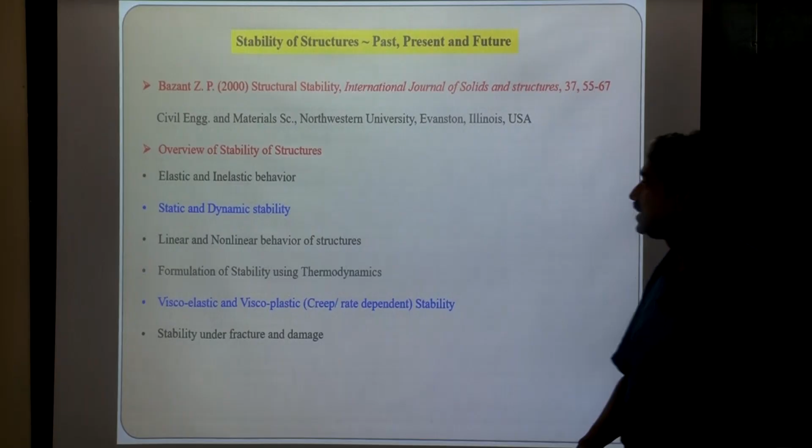So I am going to review stability of structure, its past, present, and the theory, the chronology of development, and then the retrospection of how the subject developed and who are the scientists who contributed to its development. So, the chronology you are going to refer to.

This is based on a review by Professor Bazant, who is one of the authorities in the theory of structural stability, and he has a book which can be treated as a Bible. He published a paper in the International Journal of Solids and Structures on structural stability. He is from Northwestern University, Civil Engineering Department.

The overview of structural stability we are going to present here would include inelastic stability and elastic stability first, and then inelastic stability as well. Although in the course we are going to restrict our discussion to elastic stability only, and that itself is the first subject. Then static and dynamic instability, and the importance of nonlinear behavior.

Initially it is linear, right? And formulation of stability using thermodynamics - why the use of thermodynamics may be useful or appropriate for formulating stability problems. Then stability behavior of time-dependent systems like viscoelastic systems and viscoplastic or rate-dependent plasticity problems, and stability under fatigue and under fracture and damage, which is a combination of geometric instability and material instability.

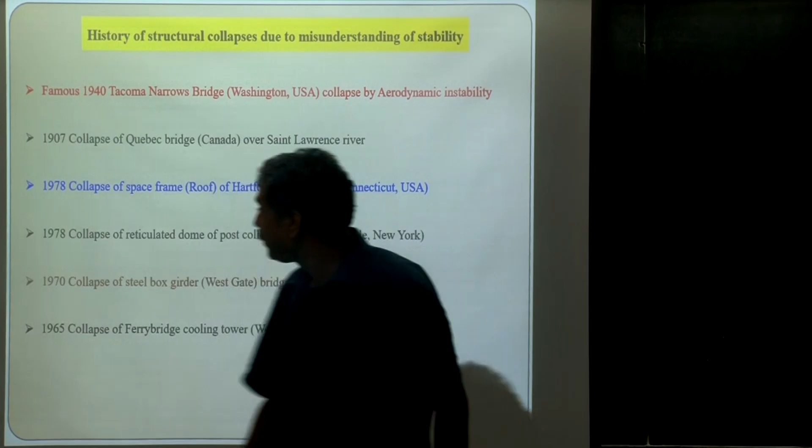There have been several failures that have triggered the quest in structural stability. Of course, 1940 is the Tacoma Bridge collapse, which was very famous or notorious - that happened on Tacoma Narrows Bridge in Washington, US, and it collapsed due to aerodynamic instability. Even before that, this is the most famous example, and all of us are aware about it. When we studied in school, we have seen the pictures, and videos are available everywhere to see how the collapse happened.

This is one of the more complicated cases which we will cover at the end of our course, but that is definitely a very compelling example of why we should study stability.

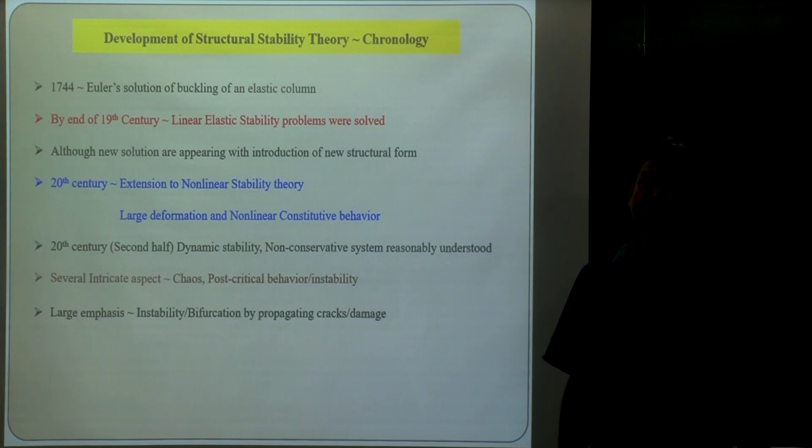Nonlinear stability theory is not very simple and not very easy to do, and it has been shown that we can capture very useful information even with linearized stability theory. They include large deformation and nonlinear constitutive behavior. So it is basically geometric instability which is responsible, and we make use of the geometric nonlinearity to develop stability theory, but along with that there can be interaction with nonlinear constitutive behavior. That means nonlinear stress strain relationship of material is also important, and that basically gets along with the geometric instability.

By the second half of the 20th century, you have a pretty good understanding of dynamic stability and non-conservative systems. Then there are several intricate aspects people started studying: post-critical instability, chaos, and today the larger emphasis in research is concentrating on instability bifurcation under material instability, that means in the form of propagating crack front or damage material like damage plasticity, for example concrete, some composites and others.

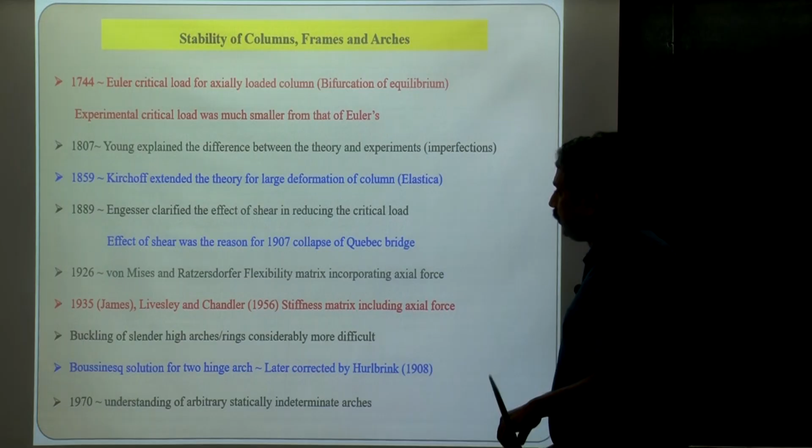So the stability of columns, frames and arches, you see these are the chronology of development. Euler's critical load was given in the 18th century, and once this theory was given, there was lots of doubt among people who didn't believe that whatever he proposed was good. Because there was huge disparity between the experimentally observed critical load and whatever was given by Euler's critical load. That disparity was explained by Young in 1807 using the concept of imperfection, that means the initial curvature of the column was responsible for this. Today also it is acknowledged that imperfections play a very important role in stability. We are going to study all these things.

Later, the elastica was introduced, where large deformation of a column was taken care of by Kirchhoff in 1859, and then subsequently there were other important effects like shear deformation, the effect of shear on buckling by Engesser in 1889. Unfortunately, lack of understanding of the effect of shear on critical load was one of the reasons for the failure and 1907 collapse of the Quebec bridge. Had we known these things, accounting for shear deformation would have prevented such a collapse.

Then for the frame, we have the flexibility matrix method and then the stiffness matrix method that were formulated. The problem with the flexibility matrix is that it gives inconsistent results, and sometimes it suffers from numerical instability. But then both of them were replaced by the modern finite element technique, which was developed around 1950s. The flexibility matrix approach was from 1926, and the stiffness matrix by James, Livesley and Chandler in 1935. Shortly after that, around the 1950s or so, finite element methods were gaining prominence and replaced these approaches.

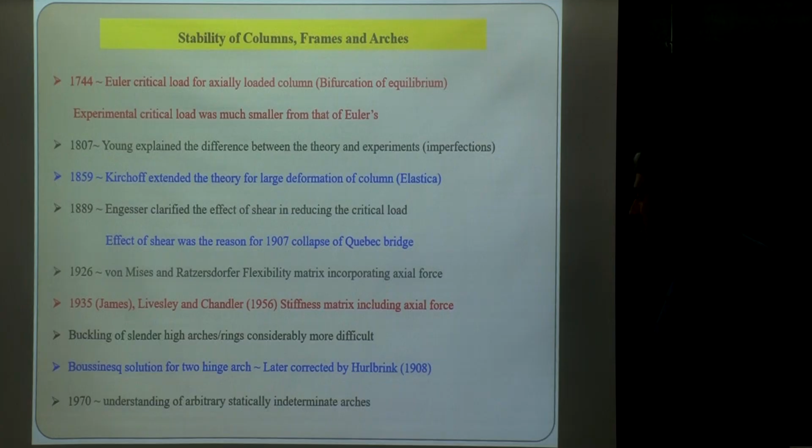Then of course those theories were extended to other one dimensional structures like buckling of cylinders, high arches, and rings. That was considerably more difficult, because arches and others have pre-buckling nonlinearity, and it has been seen that many people who tried to formulate it using linearized theory ended up getting wrong and inconsistent results. That is because all these things are significantly affected by pre-buckling nonlinearity. The first solution was proposed by Boussinesq for a two-hinged arch, and later it was corrected by Hurlbrink. By the 1970s, arbitrary statically indeterminate arches were understood.

Then for dynamic instability, as opposed to static instability, the notion of dynamic instability was given in 1893 by Lyapunov, the Russian scientist. He generalized the definition of stability for dynamic systems, and we will see that. And then there have been other systems like the parametrically resonating column.

A column, when it is axially compressed, beyond a critical value of that load, it will buckle. But if the axial load is changing over time, that means it is fluctuating or oscillating with some frequency, then something called parametric resonance happens, where the lateral vibration has half the frequency of the axial frequency of the column. So for resonance to occur, the load frequency should be 2 times that frequency. This is solved using the Mathieu differential equation, by Rayleigh in 1894. And all these, when we try to analyze static stability, are concerned with the positive definiteness of the potential energy.

That has been generalized to the topology of the energy surface, including kinetic energy for dynamics, and then we synthesize something called Lyapunov functions. That was also given by Lyapunov. There are alternate choices of Lyapunov functions that include the potential energy as well as kinetic energy, and these things were developed later.

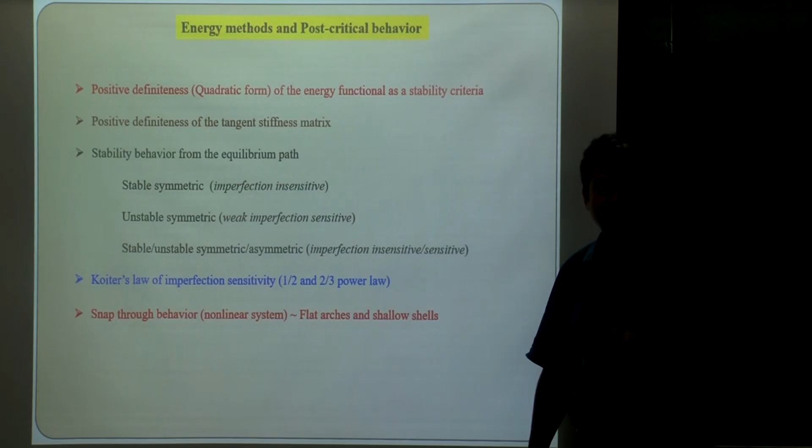Mostly for stability analysis we try to use the energy function, because that is the most standard and convenient approach, since energy is a scalar function. So we try to ensure the quadratic form of the potential energy function is positive definite, and we look at the tangent stiffness matrix in case of nonlinear behavior so that the tangent stiffness is positive definite. That basically ensures that the Hessian of the potential energy function is greater than zero.

Based on this energy approach, stability behavior can be classified into different systems, and we will study each of these. There can be stable symmetric bifurcation, unstable symmetric bifurcation. Whenever there is a loss of stability, what happens is that the system attains an alternate equilibrium configuration - the stable equilibrium bifurcates into stable or unstable equilibrium. That's what bifurcation is, associated with buckling. So you will see stable symmetric bifurcation, unstable symmetric bifurcation, or asymmetric bifurcation.

We will study these different classes of behavior, and along with that, depending on the system, there can be imperfection sensitive or imperfection insensitive behavior, meaning in the presence of geometric imperfections the system behavior can be drastically different. They can lower the critical load significantly, and that is called imperfection sensitivity. There are universal laws for this imperfection sensitivity that were developed by Koiter, called weak and strong sensitivity, with half-power and two-thirds power laws derived.

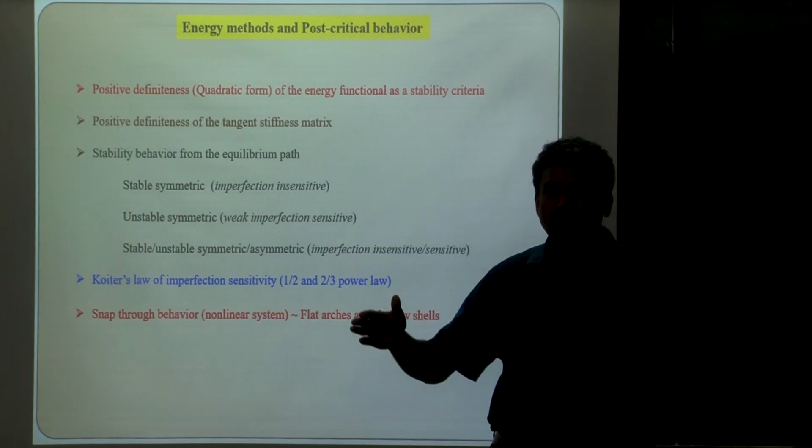Now there are other systems, nonlinear from the very beginning, in which the bifurcated configuration is not in the immediate vicinity of the original one. When a column buckles, it just achieves a little deflected configuration. But there are systems like the von Mises truss, or an arch, which on buckling immediately jump into a different configuration far apart - there is a huge gap between the alternate configuration and the previous one. These are called snap-through behavior. Those systems cannot be meaningfully linearized, which we are going to demonstrate.

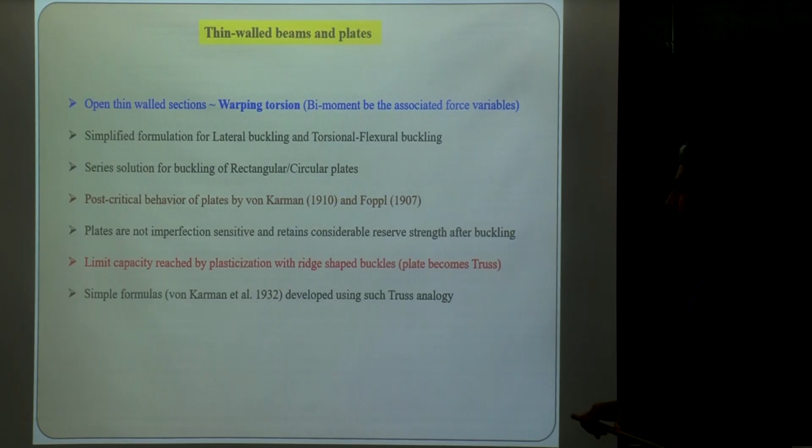Along with that, there are other sections, thin-wall sections, where along with Saint-Venant torsion, there is warping torsion, meaning the cross section deforms under torsion. You have to consider the associated force variable called the bi-moment - those of you familiar with advanced structural analysis of thin-wall sections may know what bi-moment is. Then there are formulations for lateral buckling and torsional-flexural buckling, and there are solutions for all of these that we have developed.

Then what we are going to do now is move to the more intricate topic, which is buckling of shells. Buckling of shells has a very fascinating history with a long gestation period. Initially, Lorenz, Timoshenko and Southwell started estimating critical loads for pressurized spherical shells and axially compressed cylindrical shells, because these are the two most common examples - axially compressed cylindrical shells and spherical shells under external pressure.

They found some solution based on linearized stability theory. At that time, nonlinear theory was not very well developed, and then what they saw was, oh my God, the experimental critical load they were getting is very low compared to whatever was the theoretical prediction from linearized stability theory, 3 to 8 times smaller. Can you understand the difference?

This created lots of confusion in the minds of researchers, and shell buckling always remained a very important area of research. It is a very interesting problem even today. A shell buckling research community exists, and people's contributions are always documented there, with great collections of literature.

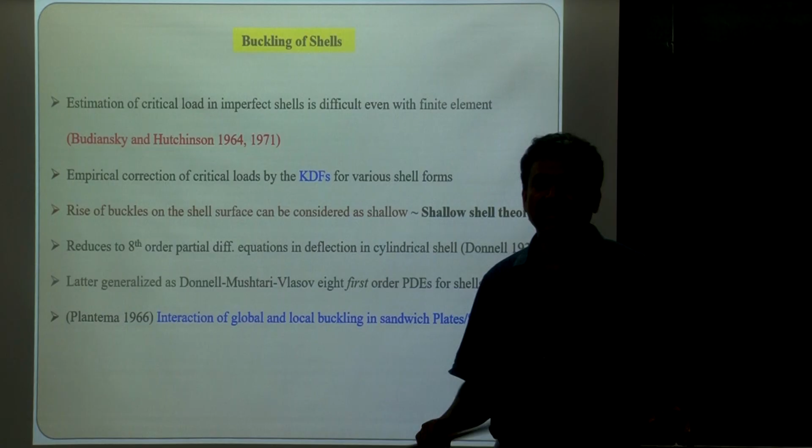Even with finite element - today's stability analysis all relies on finite element, because we have commercial software, a $1 billion industry, and we all try to use it because it's simple. Gone are those days when people used to derive lots of complex differential equations and analyze them analytically, so you have much less effort today. But even with finite element, Budiansky and Hutchinson demonstrated that it is extremely difficult to capture the theoretical load, because we have very inappropriate representation of the exact imperfections.

Traditionally imperfections were assumed to be self-affine to the buckling mode geometry, but it is not. Sometimes it is random, and that is why probability theory plays a very important role in defining this geometry, and that is what people are doing today.

So, in order to avoid these things, empirical corrections were given on the theoretical critical load by multiplying with a reduction factor, called the knockdown factor. This knockdown factor formalism is used by NASA in the US for all their space programs, using a KDF that is geometry dependent and loading dependent, for different geometry and loading conditions of the shell.

This is used. Then later there was the shallow shell theory, from the assumption that the buckles which form, the rise of buckles on the shell surface, can be considered shallow. Using that, Donnell defined an 8th order partial differential equation for the cylindrical shell, the very famous Donnell equation for buckling of cylindrical shells, and that was later generalized by others like Mushtari and Vlasov.

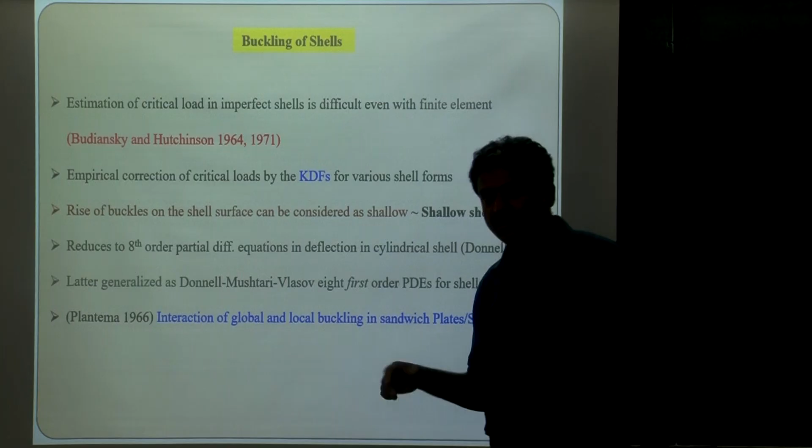Then there is inelastic stability, elastoplastic stability. This was first attempted by Engesser, who also investigated the effect of shear deformation on buckling load. He said for an inelastic column, you can just replace the formula pi-square EI by L-square, the critical load, by replacing E with the tangent modulus for the inelastic analysis.

But then later, in 1895, he reversed himself. He said let us use, for the geometry, a dependent weighted average of the loading and unloading modulus, which was referred to as the reduced modulus. But then people saw there was huge disagreement between the theoretical value given by the reduced modulus and the actual experiment on aluminum alloy, which was mostly used by the aerospace industry because of its lightness.

Then in 1947, Shanley used a simplified inelastic model for the column, and demonstrated that the original proposition of Engesser, using the tangent modulus, was the correct one. This was because there was a problem in the assumption that the column does not buckle at constant load but at increasing load, and because in inelastic behavior you can have hardening-kind behavior as well. That was the main difference.

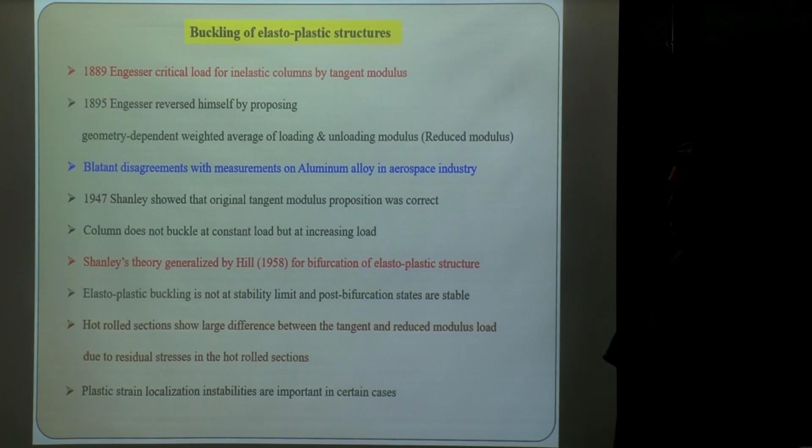There is huge influence of locked-in stresses, or residual stresses, demonstrated by the huge disparity between the theoretical load and the experimental load in hot rolled sections. That was attributed to residual stresses, because there was a huge difference between the tangent and reduced modulus loads. This also has important bearing in formulating code provisions, because in codes, when you deal with rolled sections, you need to take this into account. So some modifications have been done.

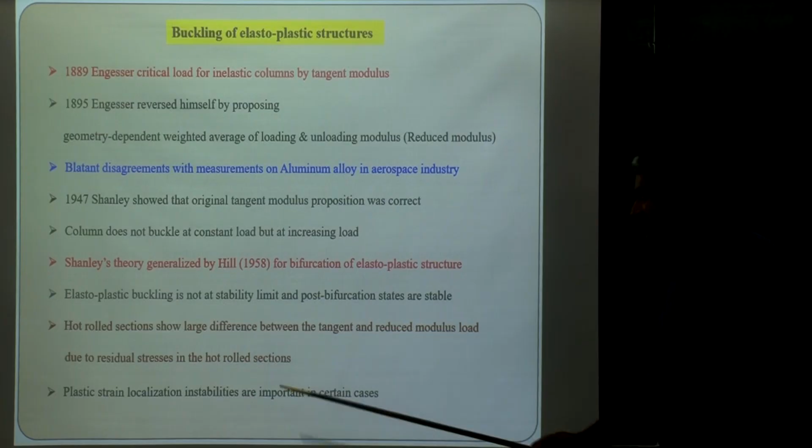It is not always that uniform yielding will happen. There are instances in which plastic strain localizes. For example, whenever you do tensile testing, you see there is a Luder's line that forms, a shear band. So those are some kind of localization of plastic strain, necking kind of behavior.

So, plastic strain localization instability is also important. Other than that, what we have seen is that while all elastic structure analysis is fine, inelastic structures basically include dissipation, sometimes inelastic dissipation of energy, because there is hysteresis - loading and unloading paths are different, and that leads to dissipation. This can be best accommodated using irreversible thermodynamics, where you can use different alternate energy functionals, like what we have learned in thermodynamics - Gibbs or Helmholtz free energy functions - and thermodynamic criteria have also been developed.

In stability analysis using energy functional, you have a Hessian of the energy functional. For equilibrium, you have minimization of potential energy, and then second order of potential energy, or for a multi-degree of freedom system, the Hessian of the potential energy functional. Its determinant must be greater than 0 to satisfy the stability criteria.

Whatever was done using energy functional can also be equivalently transformed into a thermodynamics context. Positive definiteness of the tangent stiffness matrix is shown to be equivalent to the negative of the entropy increment. We cannot measure entropy, but change in entropy can be measured. If the entropy increment for a system is negative, that is equivalent to positive definiteness of the tangent stiffness. So for inelastic systems, or systems with lots of dissipation, the thermodynamic framework can be used very efficiently to tackle inelastic stability.

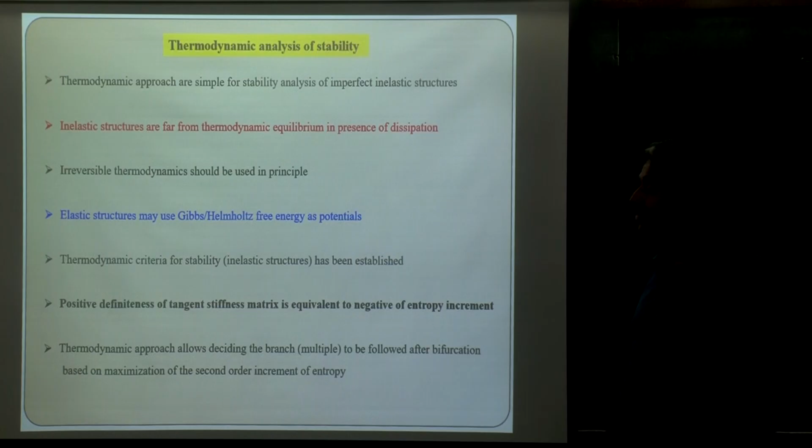Another important thing: sometimes the equilibrium path bifurcates into an alternate equilibrium path, so multiple branches occur. Now, which branch should be taken by the structure? That is a problem in numerical simulation in finite element analysis. Instead of using energy formulation, if you use thermodynamic formulation, you can very easily find out which path to follow, based on the maximum of the second order increment of entropy. That is another important result.

Now there is localization instability due to damage - this is a material instability. What happens is that sometimes damage localization occurs due to strain softening, like concrete after yielding: there is a softening branch, it does not strain harden. So for this descending peak, there is loss of positive definiteness due to softening, and the elastodynamic boundary value problem changes from hyperbolic to elliptic, per Hadamard.

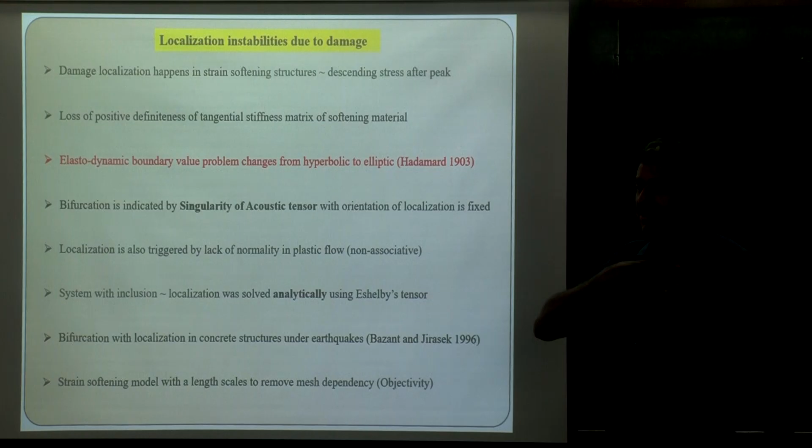There is something called the acoustic tensor that can be formulated using the constitutive matrix and the orientation. Whenever there is strain localization, there is a jump, a discontinuity in the strain field. Displacement will be continuous, but strain will be discontinuous. Those things can be found by searching for the singularity of the acoustic tensor. So that is also a kind of instability, in terms of material instability.

Then there is instability due to propagating fracture - single fracture, multiple fracture. These are all instabilities induced by cracks, propagating cracks, and others.

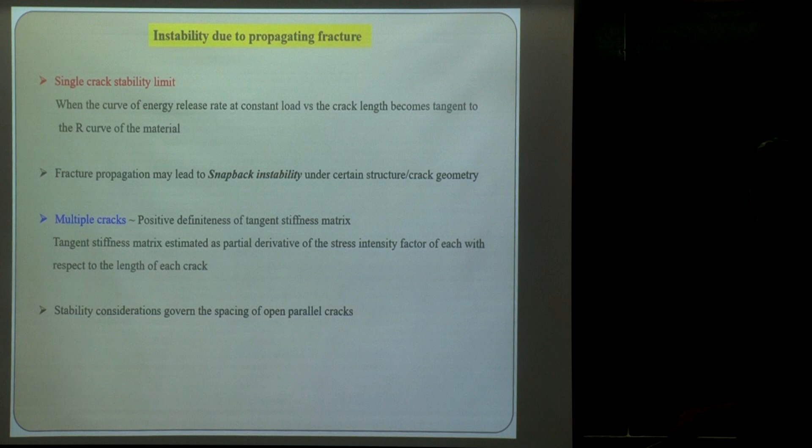Then there is time-dependent behavior in viscoelastic and viscoplastic structures. For viscoelastic systems, there is an equivalence principle: you just replace the modulus of elasticity with the viscoelastic operator and solve the equation. Of course it will be time-dependent, but the important thing is there is a long-time buckling problem, because with time the buckling load is going to change. It's formulated by replacing the elastic modulus with the respective viscoelastic operator, expressed either in rate type using a differential equation, or integral type using an integral equation.

This is referred to Freudenthal, who was also a big name in structural safety. It is not the load that is important, rather the time must be large enough to reach the critical load. For a viscoelastic system, the time required to reach that critical load should be long enough compared to the design life - that's how you ensure the safety of the structure.

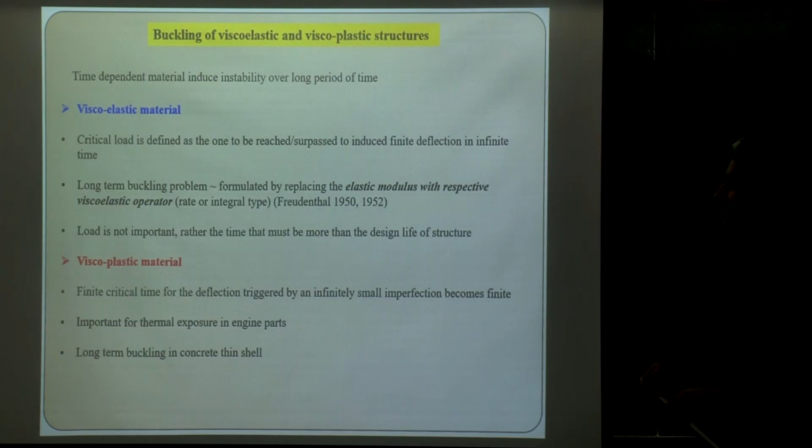Similarly for viscoplastic behavior, the only difference is the approach - you need to ensure a finite critical time for the deflection. In viscoplastic material, deflection increases with time as strain accumulates, which we refer to as creep, due to viscoplasticity. These things are also very important.

Of course this is also inelastic, because with viscoplasticity, yielding happens and at every time instant there is a change. There have been models for this, and it is extremely important for aerospace engines and others, where the material shows viscoelastic behavior at elevated temperature. You have to ensure that the critical time for deflection triggered by infinitely small imperfections becomes finite - a small imperfection can have huge implications for viscoplastic materials because it accumulates.

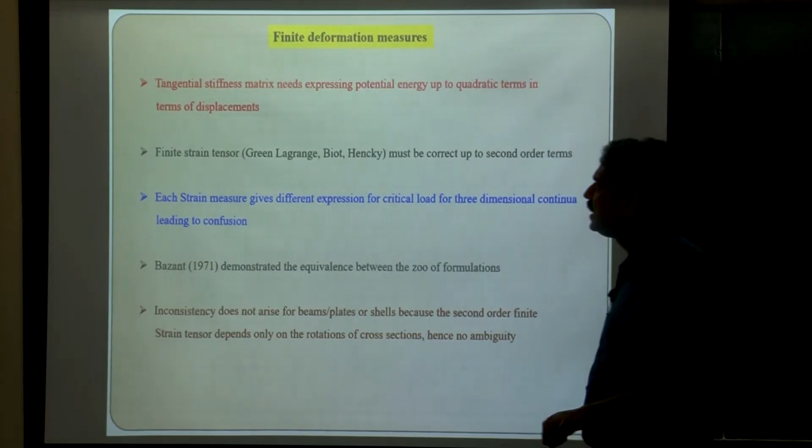Then there is another approach, what we were talking about in the tangent stiffness matrix, but tangent stiffness matrix for finding out the geometry, its Hessian and others - you need to have potential energy that must be correct until quadratic term in terms of displacement when you express it. However, there are alternate definitions of finite strain tensor, because when we deal with finite deformation, there are alternate and conjugate definitions, like Green Lagrange, Biot, Hencky, and that must be correct up to second order. But all these things used to give different expressions for the stability analysis of 3-dimensional continua, and this inconsistency was leading to lots of confusion.

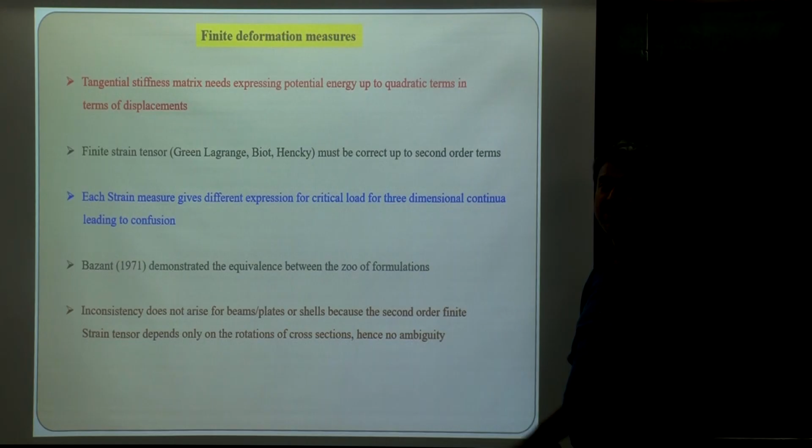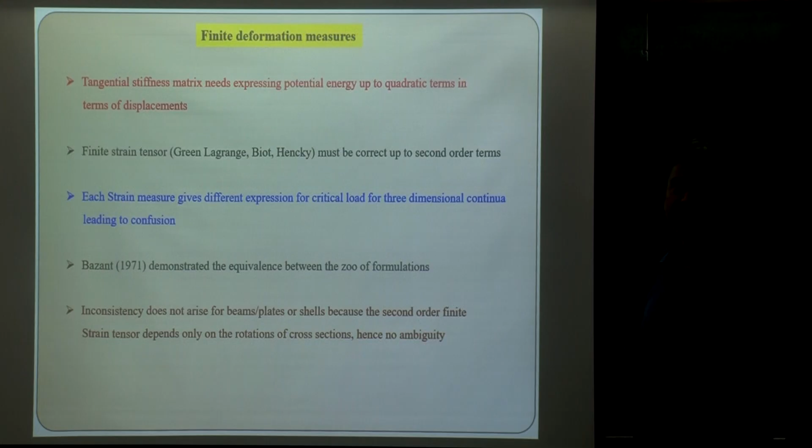This is not important for plate, shell, or beam column. Why? Because the second order finite strain tensor depends only on the rotation for these, del W del X. So that is why this discrepancy was not important for plates and shells and others, but for the 3-dimensional continua, when you want to study surface buckling or buckling of the 3D continua, then you have to make sure that the potential energy function's quadratic terms are expressed in terms of displacement. But then all these alternate strain tensors produce different results; however, equivalence between all these things has been proved by Bazant, who was one of the prominent figures, because there have been huge formulations presented to remove these discrepancies.

Those of you who are familiar with finite deformation theory will try to understand these things; we will not cover this. So the conclusion is that by now, stability of elastic structures is well understood, and refinement is still expected for elastic stability as well, especially with the advent of new structural configurations and material behavior. But the greater challenge today is stability in the presence of material instability in the form of fracture, damage, softening damage, and strain localization.

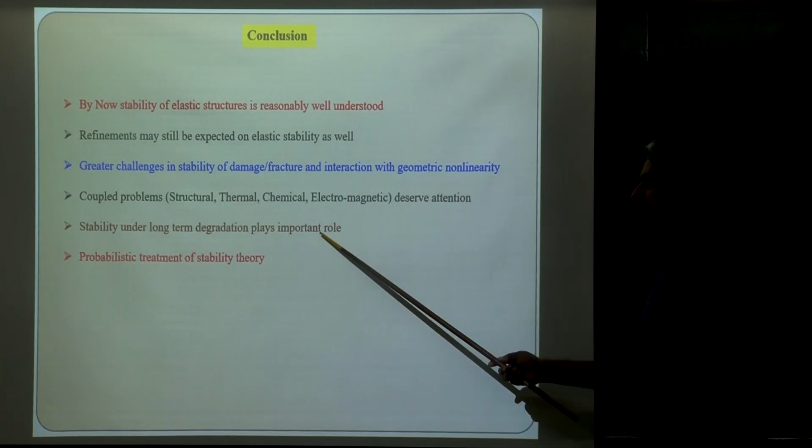And coupled problems, where not only mechanics but mechanics is coupled with thermal phenomena, mechanics is coupled with chemical kinetics, mechanics is coupled with electromagnetics. So for these stability coupled problems, these still remain unsolved, and more thought is required, and people are working on that. And also the long term degradation, for example under chemomechanical degradation - what is happening there.

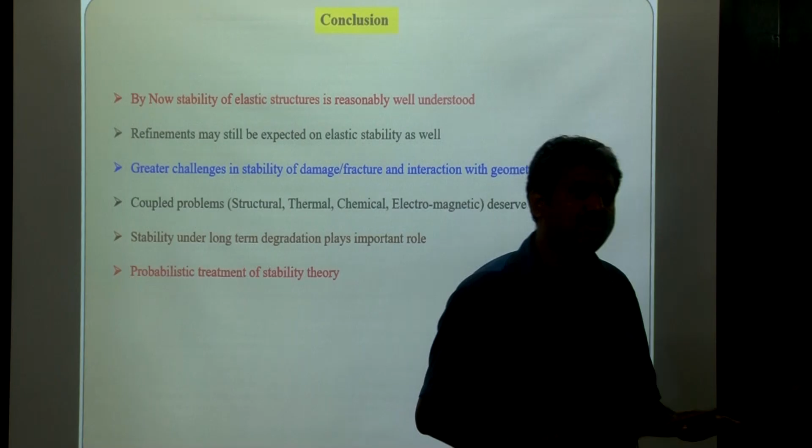Along with that, of course, very important is the probabilistic treatment of stability theory. Why? Because no matter what you do, imperfections will always be very important, especially for structures which are imperfection sensitive. There exist large classes of structures which are imperfection sensitive, and when you want to describe imperfection physically, you need to use probabilistic means. So that is another important thing. With these things we reasonably reviewed the need of structural stability, and what great minds have been doing over the past more than 2.5 centuries, starting from 1744 by Euler, up to today's latest developments.

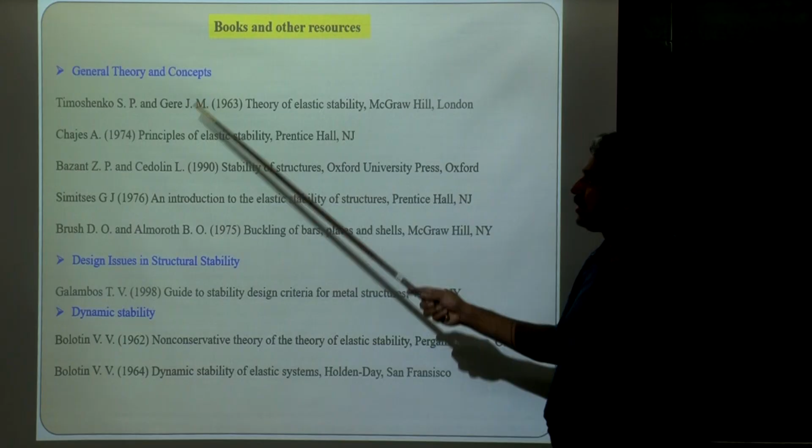Now, with these things we will start, but before that I will refer to several important books for you. There are many good books for the general theory and concept. Of course, Timoshenko and Gere is the one which is a classic in the theory of elastic stability. Then there is a book by Alexander Chajes, Principles of Elastic Stability - I refer to it, the years given may not be correct because there have been newer editions, but that doesn't really matter. This is from McGraw-Hill, this is Prentice Hall, and then there is this book by Bazant and Cedolin, which I follow. Of course, in certain places you have to be cautious, but I treat this as the Bible of stability - very good, very thick, and it covers almost all aspects of stability.

It may be a little difficult to follow unless you have a reasonable background in structural dynamics, finite deformation, elasticity, plasticity, a bit of fracture, and a bit of damage mechanics. If you don't have all this background you cannot follow all of it, but whatever we are going to cover, you can definitely follow. Then there is a good book by Simitses, Introduction to Elastic Stability, by Prentice Hall, and then Brush and Almroth - this is a very good book. Of course, I think they lack a new edition, but this is one of the very good books which I sometimes consult - Buckling of Bars, Plates and Shells. Now, all these things are mainly on the theory of stability.

They refer time to time, briefly to the design aspect, but if you want a comprehensive treatment on design guidelines based on stability theory, you must consult Galambos, Guide to Stability Design Criteria for Metal Structures. This is a very good book.

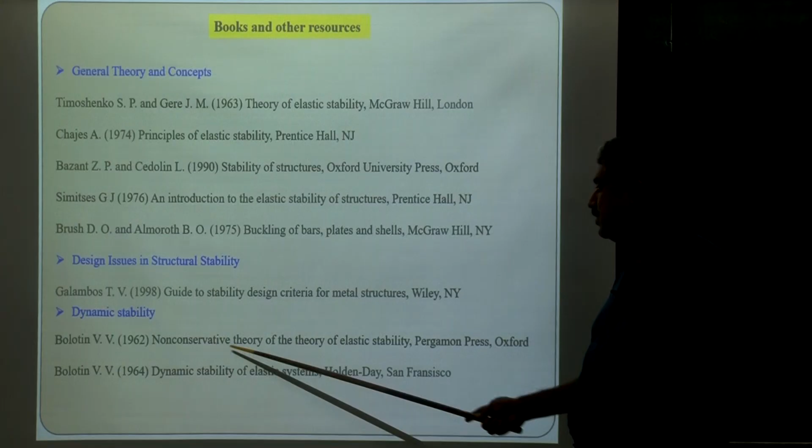Only for dynamic stability, not that other books don't cover it, but if you want to explore more details, then Bolotin's two books: Non-Conservative Theory of Elastic Stability, and Dynamic Stability of Elastic Systems. One is Pergamon Press, and Bolotin is one of the prominent names in dynamic instability.

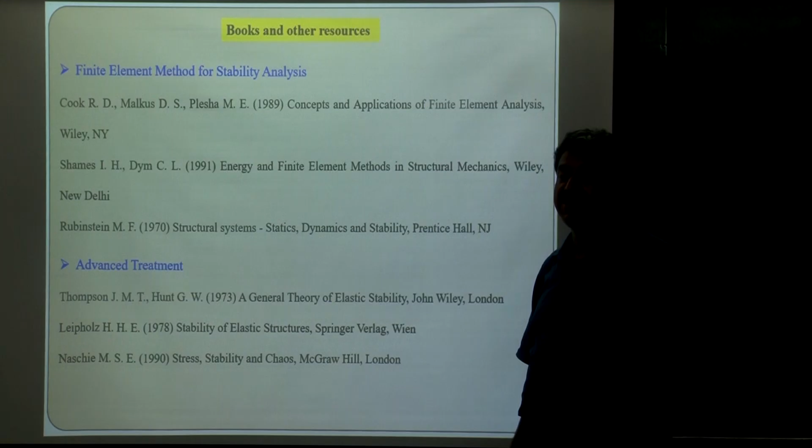For finite element method, today's stability analysis all depends on finite element. Everybody wants to do simulation rather than dealing with complex differential equations, whose solutions are even more complicated. So you have to be cautious using finite element theory, because sometimes it can be very misleading unless used with proper judgment and clarification.

For finite element method, we follow this simple book: Cook, Robert D. Cook, Malkus and Plesha, Concepts and Applications of Finite Element Analysis. Along with that, there is another book by Shames which is also good, and Rubinstein - a simple book not only on structural stability but also covering static, dynamics and stability aspects.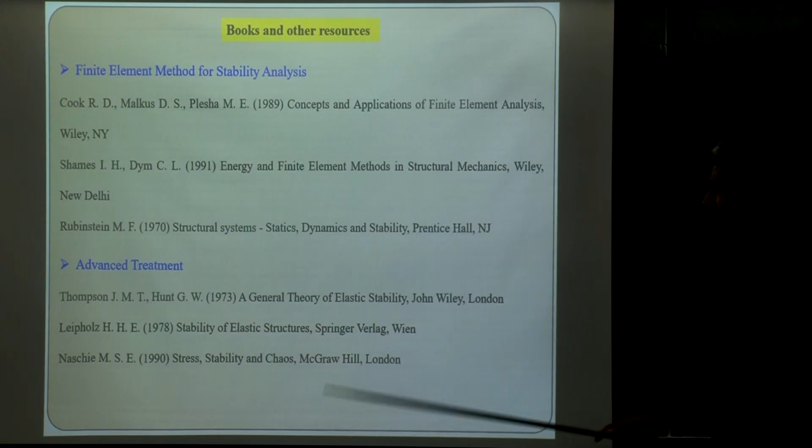For advanced things which you don't require for this course, but nevertheless I'll mention them: Thompson and Hunt, who made huge contributions in development of stability theory. Their paper, A General Theory of Elastic Stability, and then Leipholz and Naschie. All these are for advanced treatment.

With these things I will stop here. So we will start the stability class, and I will use the blackboard for this. This is the first lecture, on stability of structures.

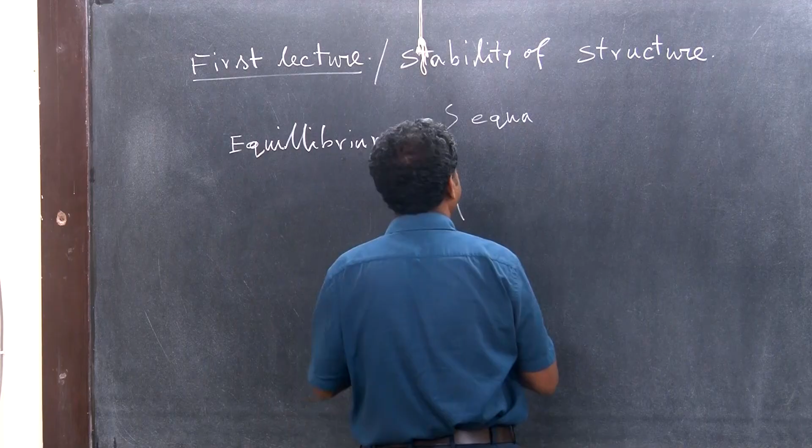The first lesson to learn for stability of structures is that in all other courses, we were concerned about equilibrium. In civil engineering systems and structures, whatever we are concerned about is equilibrium. In equilibrium, what do we do? We write down the equilibrium equations in undeformed configuration - that's what we write, not in deformed configuration. But in stability, there is a little difference.

In stability, the first lesson in a stability class is that we write the equilibrium in the deformed configuration. We have to analyze equilibrium in deformed or perturbed configuration. I will try to explain why perturbed configuration.

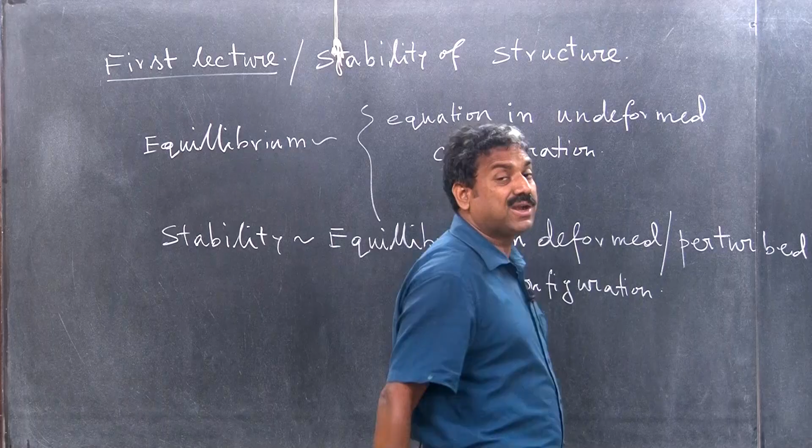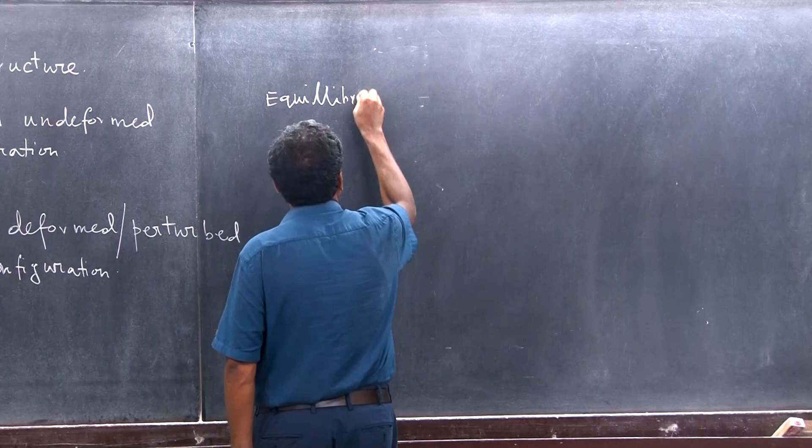Why is that so? Let us go back to our school level physics. When we learned the concept of equilibrium, we were given a system and had to determine whether it was in equilibrium or not - that was the zeroth order or first order information. Once we know the system is in equilibrium, we have to inquire whether that equilibrium is stable, unstable, or neutral. That is higher order information. So equilibrium can have three different states: stable, unstable, or neutral.

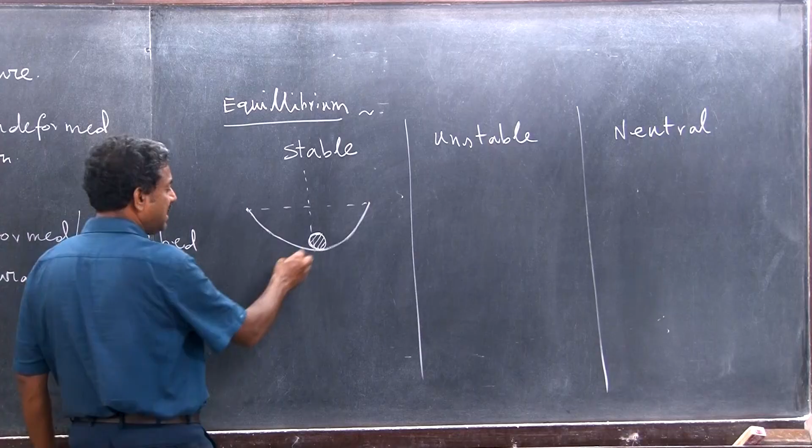This is what we learned at school level - let me use a simple example. Consider a bowl, and we put a small ball here. This small ball, made of steel or any material, is in equilibrium because its weight acts downward and it has an upward reaction - R equals W. So it is in equilibrium. Now we want to study the nature of this equilibrium.

What really happens to this ball? How will you see whether the equilibrium is stable or not? For that, we want to perturb it - we took it here, gave a little perturbation, and wanted to see whether it comes back to its original configuration or not. Or we perturb it here and see whether it comes back. In both cases, this perturbation can be expressed in terms of angle theta. In both cases it is coming back - why is it coming back?

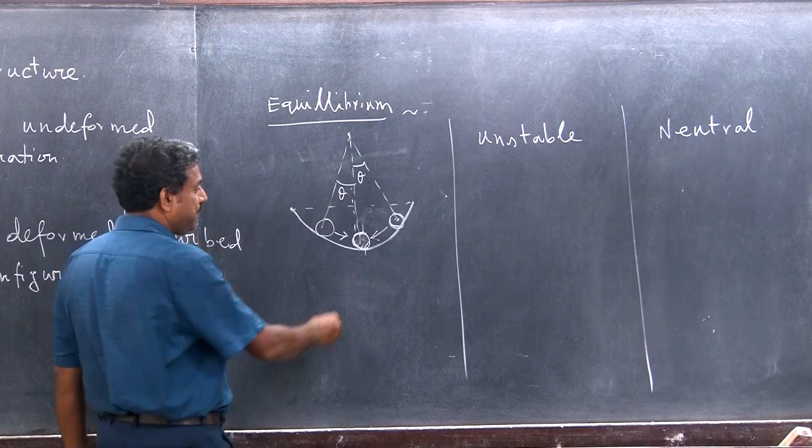Because a component of its weight mg is basically giving a restoring force to come back to its original configuration, and that is why the equilibrium is stable.

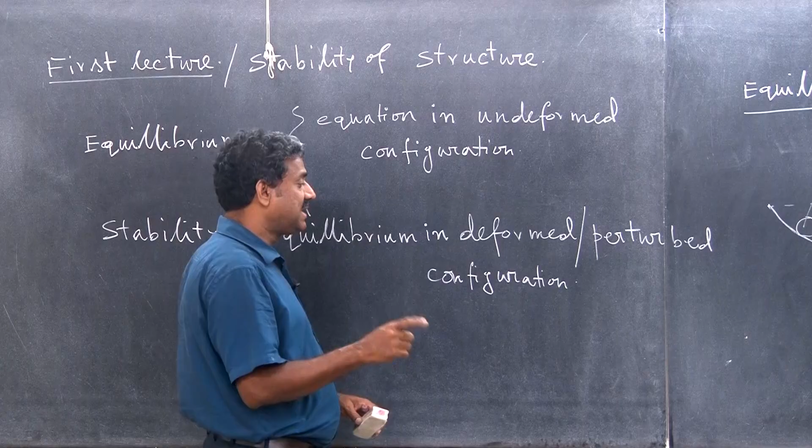But in order to see the nature of equilibrium, what do we do? We perturb it, to check its behavior in a deformed configuration. The stability of equilibrium needs to be assessed in the deformed or perturbed configuration. That is the first difference. Until now, when we were only concerned about equilibrium itself, we did not care about the perturbed configuration, but here we have to care about the perturbed or deformed configuration, and then write down the equilibrium equation.

Similarly, consider the same ball, but now put in a convex shape instead of concave, and you put the ball over here. What is going to happen if you give a little perturbation? This fellow will diverge, it will fall. That means it is not coming back to the original configuration. Why? Once again, the component of its weight is basically allowing it to diverge.

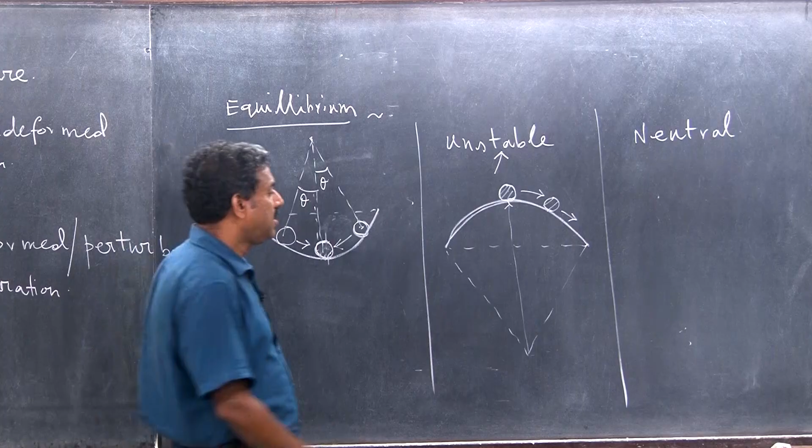So this is an unstable configuration. Once again, when we ascertain that the equilibrium is unstable, we have to perturb the configuration, and this perturbation is given in terms of theta.

Now there can be a third possibility: there is a plane, and on top of it this ball is kept, and wherever you put the ball, it does not really care, it will stay in its position. So this is referred to as neutral equilibrium.

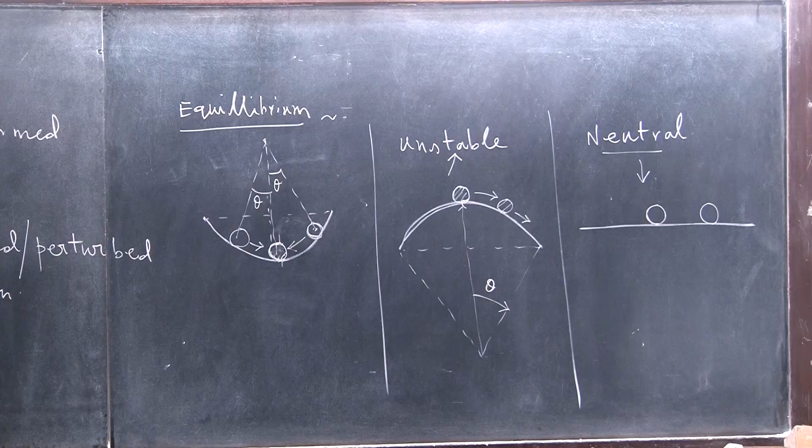So equilibrium is the first order information, and then higher order information is the nature of equilibrium, whether it is stable, unstable, or neutral. And the thing we learned is that in order to study the nature of equilibrium, we have to see its behavior in the deformed or perturbed configuration.

Okay, so that is the first lesson of stability. Now, the way we are going to study this first, can we define some energy, some measure of stability, something we can quantify mathematically? Yes, we can. What we have seen is the most convenient way to analyze an elastic system is when the system is in equilibrium.

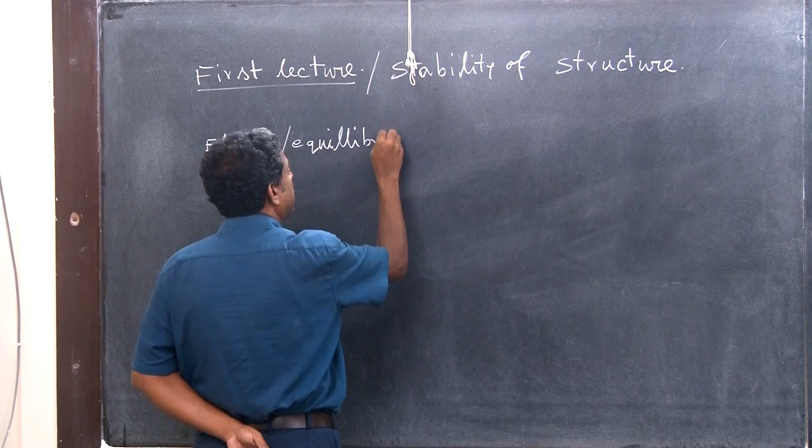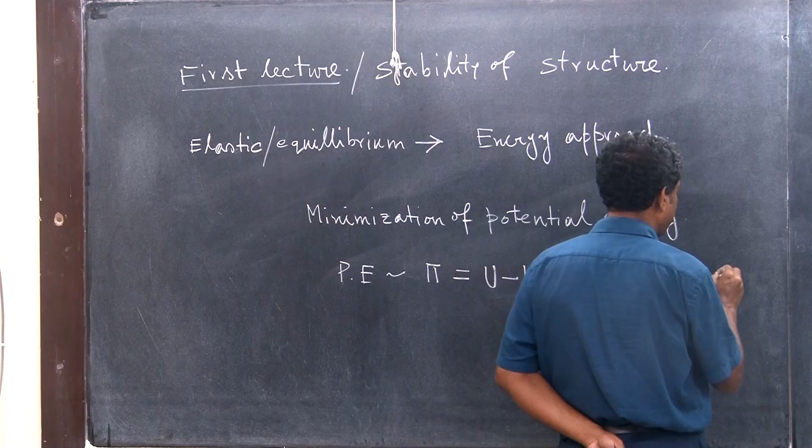You can recall, we have our energy approach. In the energy approach, what did we do? We learned in strength of materials or structural analysis that all equilibrium is based on minimization of the potential energy. That means potential energy, which we denote using pi. And what is potential energy? It is the strain energy minus work done.

And you know how this is coming: the strain energy is a component of the energy stored in the system. If it is doing some work, that means the energy is dissipated, so that work must be subtracted. That is the basis.

So once we have the potential energy functional, then for equilibrium, what do we know? Minimization of the potential energy. That means del pi with respect to what? Del pi by del u is equal to 0, where I am assuming its degree of freedom is given by u. U is the degree of freedom, so a system can have a certain degree of freedom.

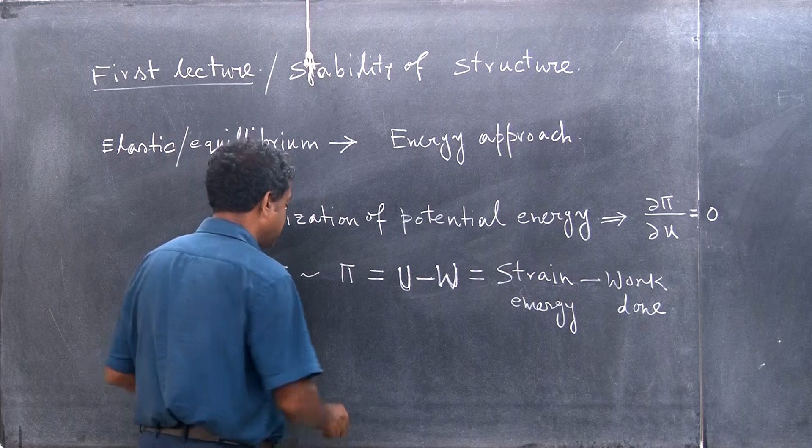So when we write potential energy, pi is a function of what? It is a function of the force being applied on the structure and its displacement. Now, force is related to displacement anyway, k into u if it is an elastic structure, so I can express it solely as a function of the displacement u. So I can write for minimization: del pi by del u is equal to 0. That is the minimization of the potential energy.

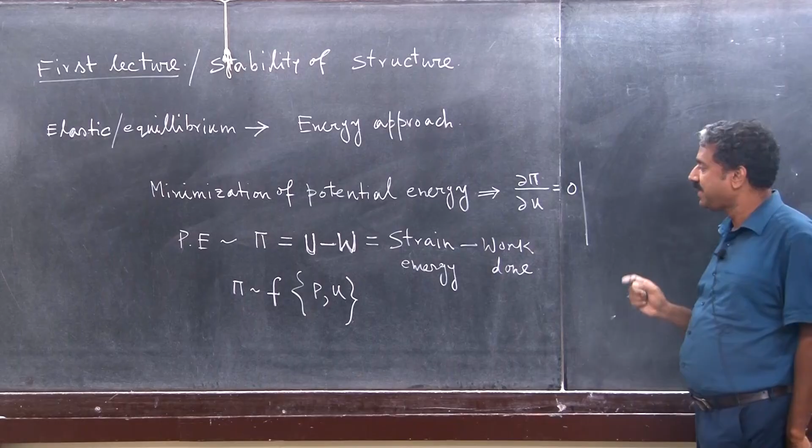So if minimization of the potential energy refers to equilibrium, then we will see that whether the equilibrium is stable or unstable can be found out by scrutinizing or investigating its higher order derivative. How? We see that it is a function of u, the generalized displacement, along different degrees of freedom.

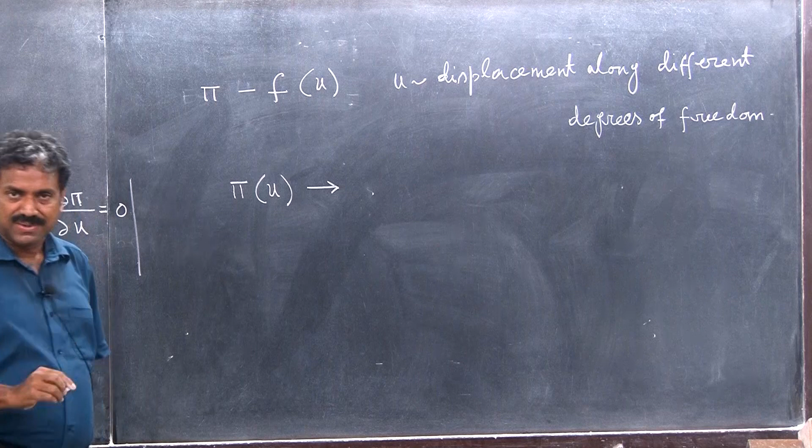So, pi is a function of u, the potential energy function pi is a function of u, and we are giving a perturbation. So u we can put it U0. U0 is the initial configuration, some initial or datum configuration, right? So pi U0, and then when we are giving a perturbation, it becomes U0 plus delta U. Delta U is the perturbation displacement.

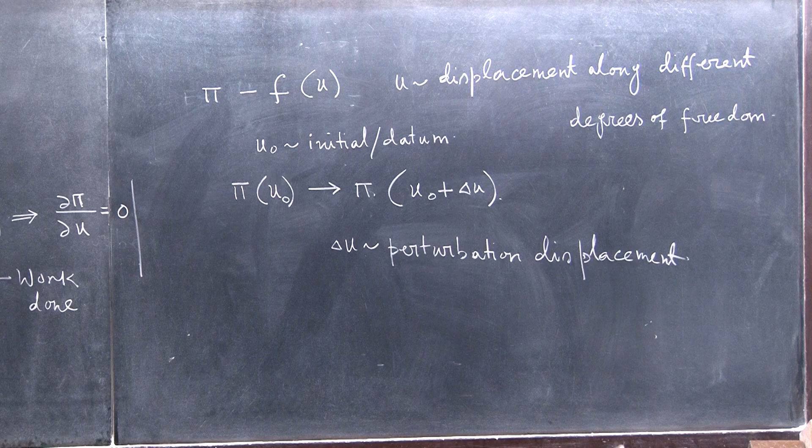Displacement. So what is happening due to perturbation displacement? Can we use, so we have learned to use, we are trying to express everything in terms of potential energy. We use the potential energy functional, and we give a perturbation because we know we have to perturb it.

So, can I use Taylor series expansion around this datum: U0 plus del pi del U at U0, delta U, plus 1 by factorial del 2 pi del U2 delta U square, plus whatever.

Now, I am assuming that at the datum, we can choose the datum such that our potential energy at the datum is 0, pi at U0 is 0. How is it 0? For example, consider this concave bowl, and we put the ball at the bottom, treating the lowest point as the datum. Then this is 0, right? So this is 0.

If this is 0, then what have we seen for equilibrium? Minimization of the potential energy, right? So minimization means this is also 0, right? Minimization of the potential energy.

Now, a system is in this configuration and we are perturbing it to another configuration. If the system is stable, I will not go to that configuration, because when I go to that configuration, if it leads to an increment in potential energy, every system tries to attain its minimum potential energy configuration. So if, when I am perturbed from here to there, there is an increase in energy, that configuration is not conducive for my move. So how is that?

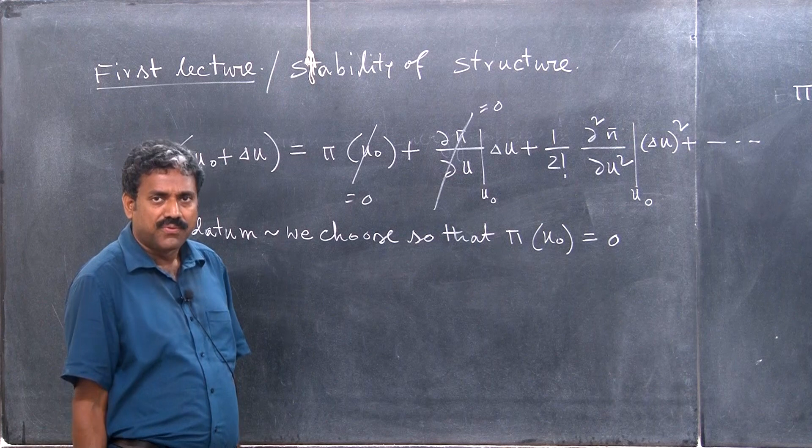So delta U square is always positive, always. So we can clearly see, if del 2 pi del U2 is greater than 0, that means the system is stable. Why is it stable? Because by perturbing, you are taking it to a configuration in which its potential energy is increasing, and all systems try to attain the minimum potential energy configuration. So this greater than 0 is a condition for stable equilibrium.

However, if del 2 pi del U2 is less than 0, that means when going from U0 to U0 plus delta U, there is a reduction in potential energy, so it will try to attain that, because by doing so it is minimizing the potential energy. So it will always try to move there, meaning whatever equilibrium is at U0 is unstable. And if del 2 pi del U2 is 0, that means by perturbing from U0 to U0 plus delta U, there is no change, so it does not really care - it is neutral equilibrium.

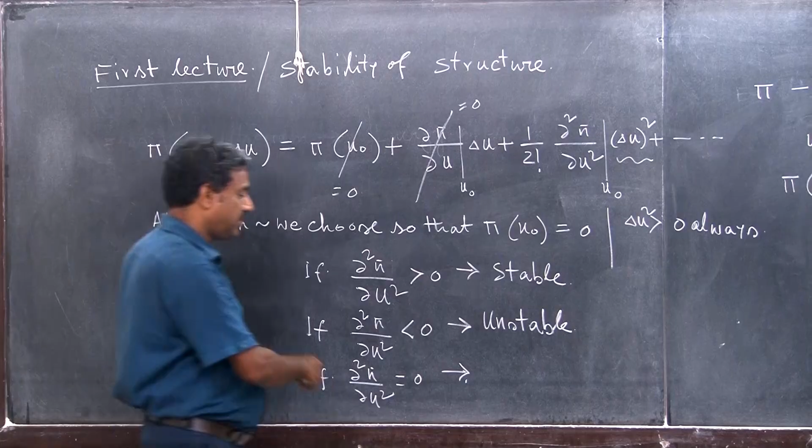I hope all of you understand why this is associated. So you can clearly see the first case here, where the ball is in the lowest position. You are taking it to this position, and it will clearly come back here. Why? Because when taking it from here to here, there is a positive increase in potential energy. So del 2 pi del U2 is greater than 0.

When it is here, when it is here, from here you are perturbing it to here, it is a reduction in potential energy. So del 2 pi del U2 is less than 0, and then for the other case, I will just try to do it. So this is for a system which has a single degree of freedom, right?

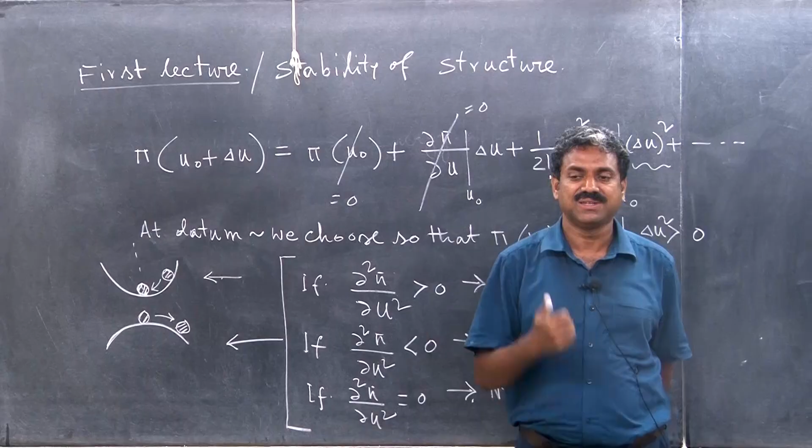This system I am considering, u0 is the only displacement quantity, that means a single degree of freedom. If I generalize it for a multi-degree of freedom system, what will happen? Generalize for multiple degrees of freedom. So then what will happen?

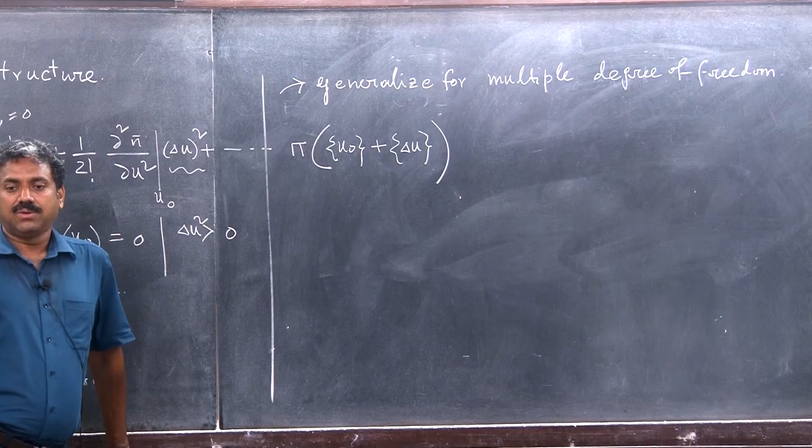Here is the potential energy, the only thing is that u0 will be a vector because it is multiple u01, u02, u03, and then your perturbation will also have delta u. Of course, when you perturb it, you have to keep in mind that you have to enforce the boundary conditions. There must be admissibility, right?

So here it is, pi once again at u0, plus del pi del u, here it is u0. Of course, this is a vector, del pi del u is a vector, please note that. So when I am writing del pi del u, this is a vector, times delta u, and then plus 1 by factorial, delta u transpose del 2 pi del ui del uj at 0, delta u. Higher order terms we do not consider, not that it cannot, it should not be considered.

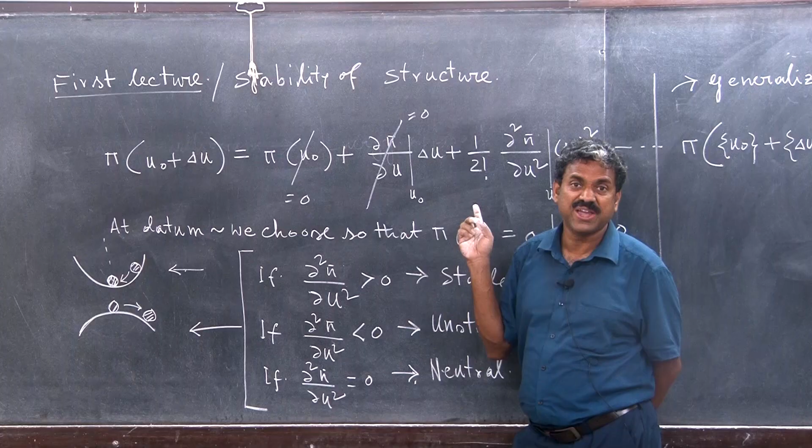Please note that if this is 0, that means if it is non-decisive, inconclusive in terms of del 2 pi del u, then you have to look for higher order derivatives. But if it is there, just omitting the higher order term does not mean those are irrelevant. There are systems in which the stability cannot be ascertained using the second derivative, those will be vanishing. So then you will show using a solved example that you have to look for higher order derivatives, 4th order, 6th order, something like that.

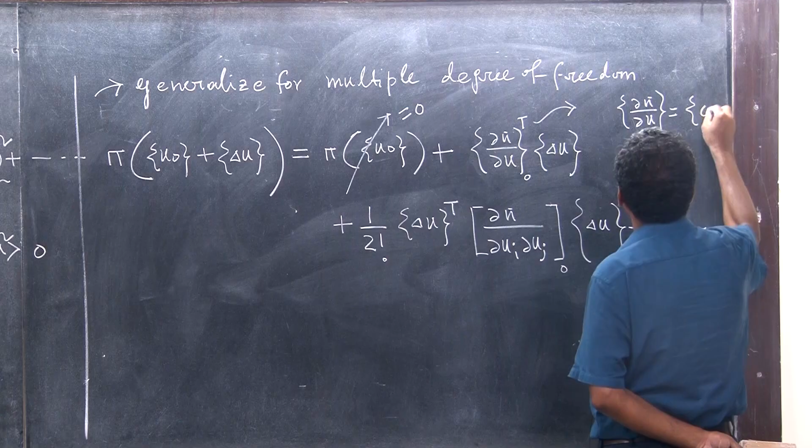So here you see, minimization of the potential, and if the datum is taken to be 0, minimization of the potential energy gives delta u, anything, it can be positive, negative, it does not matter. So minimization of the potential energy makes del pi del u at u equals u0 equal to 0, right. This ensures that the system is in equilibrium. So this is the first order information, that means the system is in equilibrium.

Now the higher order information for a multi-degree of freedom system, what will happen? Of course this del 2 is a matrix, this is called the Hessian matrix, the Hessian of the potential. Those of you who did an optimization course will know, because this is used in the Newton's method for optimization to find the minimum point, for the numerical search technique. The Hessian matrix, now this is a matrix for the stability condition.

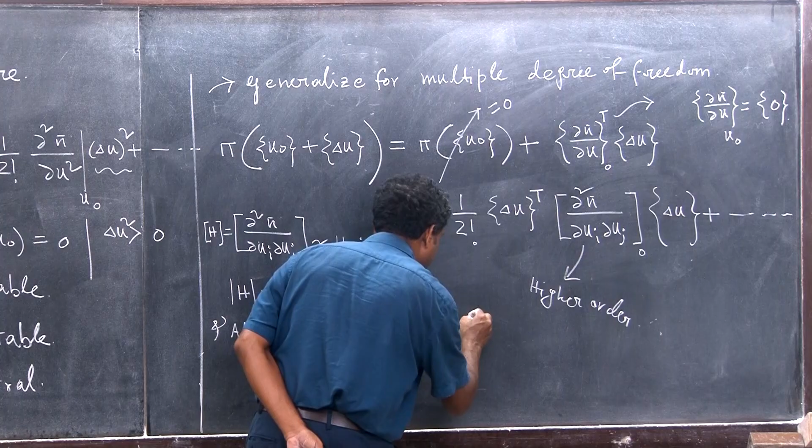So I am defining the Hessian H for the potential. The determinant of the Hessian must be greater than 0 for stability, and all its principal minors, you know what a minor is for a matrix, right? Principal minors must be greater than 0 for the stability condition, the determinant of the Hessian matrix must be greater than 0, and all its principal minors.

Principal minors, meaning corresponding to the diagonal term, if you take the diagonal term, then whatever submatrices remain, the determinant of that. So those are principal minors. So if the Hessian is greater than 0, and all the principal minors are greater than 0, then it is stable. If the Hessian matrix is less than 0, or any one of these principal minors is less than 0, then it is unstable. And if all these vanish, it is inconclusive.

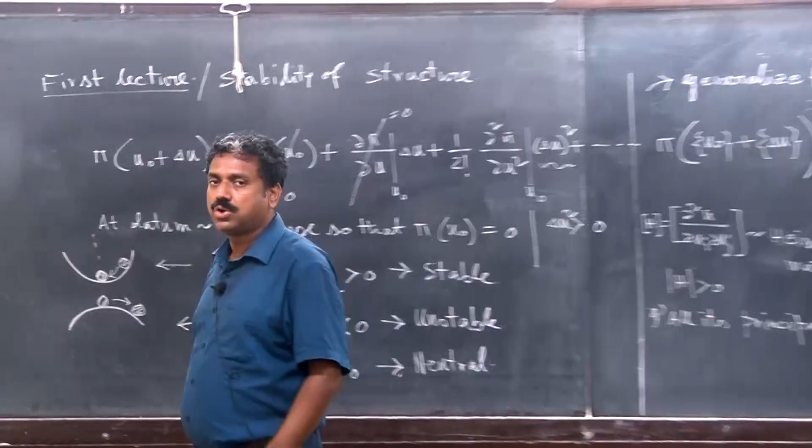So you understand, from the single degree as well as multiple degree, the derivative of the potential energy function, here the determinant of the Hessian. Once again, this is nothing but the second order derivative of the potential energy function, but the only problem, because you have a multiple degree of freedom system, you will have a varying combination among the degrees of freedom, 1-2, 2-3, 3-1, something like that. So you can solve, if you want, a simple system.

So this system, if you want to solve mathematically, here the ball is put, and you see that. This is the radius of curvature r, and then it is perturbed to a different configuration, going there. This is r, and this angle is theta.

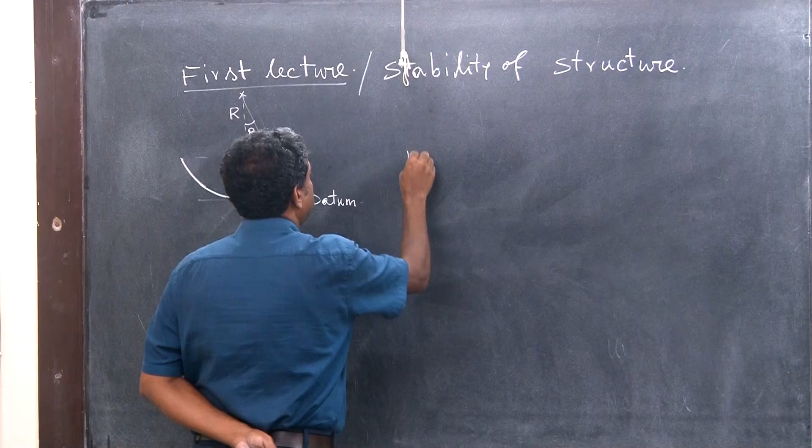The first step is to perturb the configuration. I am treating this point as datum, so when the ball is here, it has zero potential energy. How is potential energy defined here? This position will move here, so potential energy is m into g, the work done, assuming mass is m and g is gravitational acceleration.

This distance is r minus r cos theta, that is r times 1 minus cosine theta. So potential energy is mgr(1 minus cosine theta). Now for equilibrium, del pi del theta equals mgr sine theta.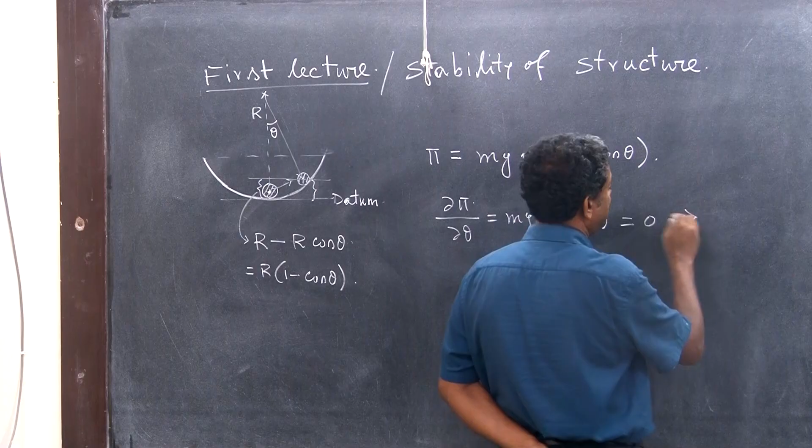If you want to make it zero, then sin theta is 0, so theta is 0. That's the equilibrium, you see that. Equilibrium you will get automatically, so it will be equilibrium when theta is equal to 0.

Now for theta non-zero, for stability we look at del squared pi del theta squared, with a single degree of freedom system since potential energy is expressed in terms of a single displacement variable theta. So the double derivative is mgr cosine theta.

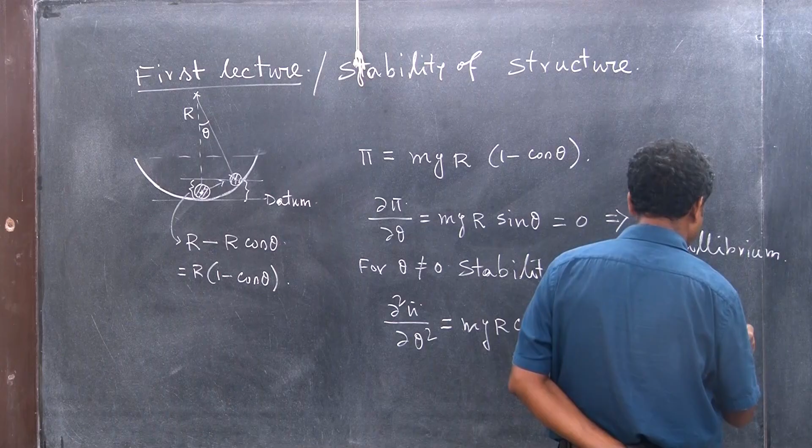So mgr cosine theta. Assuming theta is small, for small theta this is always greater than 0, so that means it is stable. That way we can prove that this is stable.

Similarly, you can also solve the problem where the surface is convex. Here you place the ball, then perturb it. I am treating this point to be datum. From here to here, what is the potential energy? If I treat this to be datum, and this is r, with angle theta, then potential energy is mgr cosine of theta.

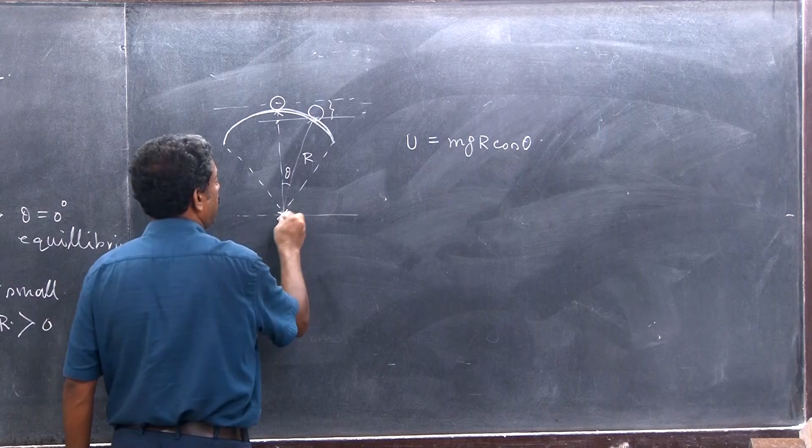This datum is the center of curvature, so potential energy is mgr cosine theta. Then del pi del theta is mgr sin theta... minus sin theta, so 0. Here theta equal to 0 is the equilibrium. The double derivative, del squared pi del theta squared, is minus mgr cosine theta, which equals minus mgr.

So it is always less than 0, it is unstable. Do you see that? Unstable. And if you consider any system on a flat plane, potential energy will be mgh, and the difference is always 0, so del squared pi del theta squared doesn't really matter.

Okay, clear? Now we will solve the problem for the multi-degree of freedom system in the next class, but before that, one more thing I want to emphasize, connecting to what we learned in our undergraduate course about determining the critical load for a column due to buckling. Here we are going to consider the same with a little more insight.

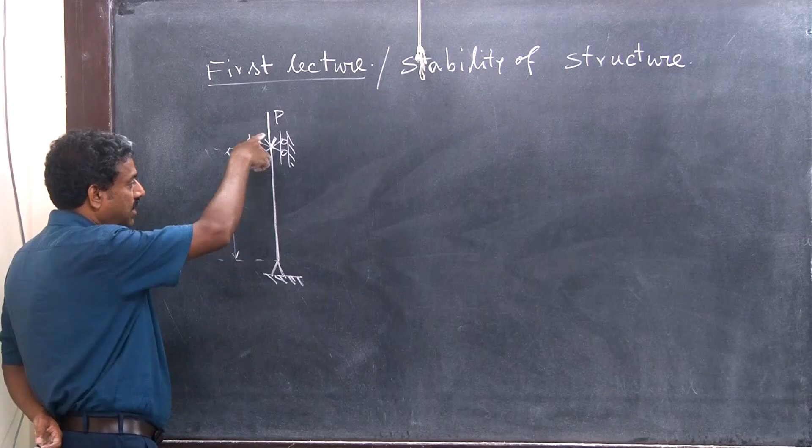So for that, if we allow it to deform, it looks something like this. Load P is given, this is hinge and that is also hinge. I am assuming this is length L, and this is flexural rigidity EI. Now we have to allow translation for this, so P is applied to this hinged column.

We will try to study its stability behavior. One way to do this is following the potential energy approach, but we have not used that approach in undergraduate. In undergraduate, what did we do? We perturbed it, assuming there is a deflection Wx, with x assumed along the longitudinal axis.

So when perturbing, once again the first lesson for stability analysis is to perturb the configuration. That's what we are considering. Because of this perturbation, there is an additional bending moment that comes. If load P is there, then P into Wx is the bending moment.

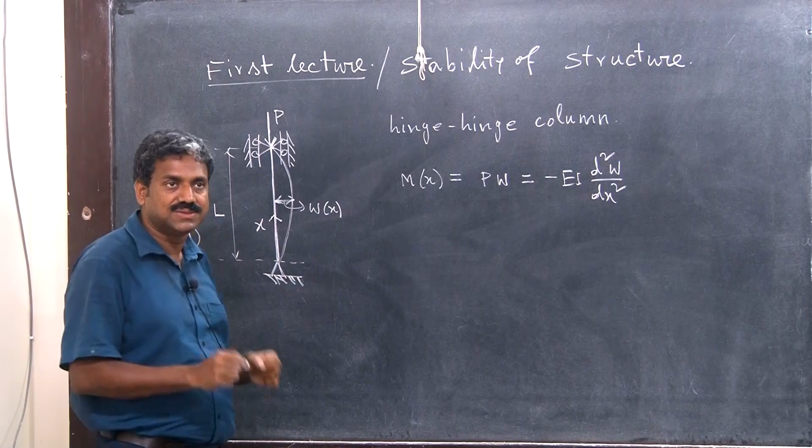And that is nothing but minus EI. Bending, you assume that our deflection is infinitely small, the perturbed configuration is infinitely small, we are assuming small deflection, right? So then we can write d2w/dx2 plus P upon EI, W is equal to 0.

So P upon EI, means d2w/dx2, and we are defining P by EI as lambda square, so lambda square W is equal to 0. So it leads to a second order differential equation, right? We know how to solve a second order homogeneous differential equation.

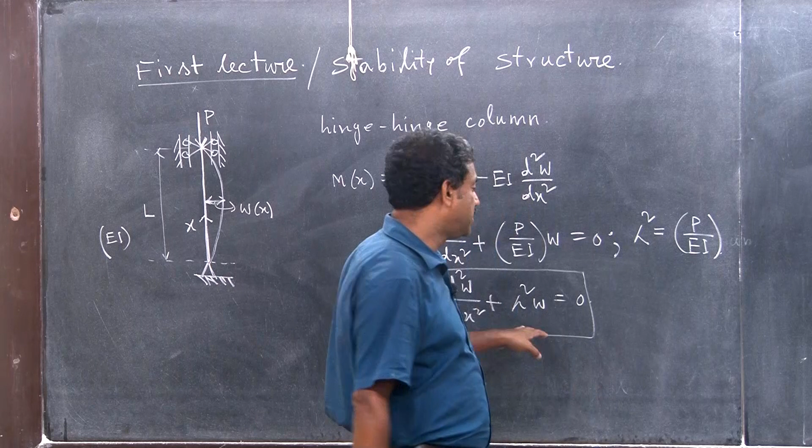Of course, we have the boundary conditions. What are the boundary conditions? At x is equal to 0, W is equal to 0, no deflection because it is hinged. At x is equal to L length, deflection is 0, right? Two boundary conditions, second order equation, both expressed in terms of W, that is permissible.

So the solution of this differential equation, as you see, is A cosine of lambda x plus B sine of lambda x, that we know, and since it is a homogeneous equation, there will be no particular integral.

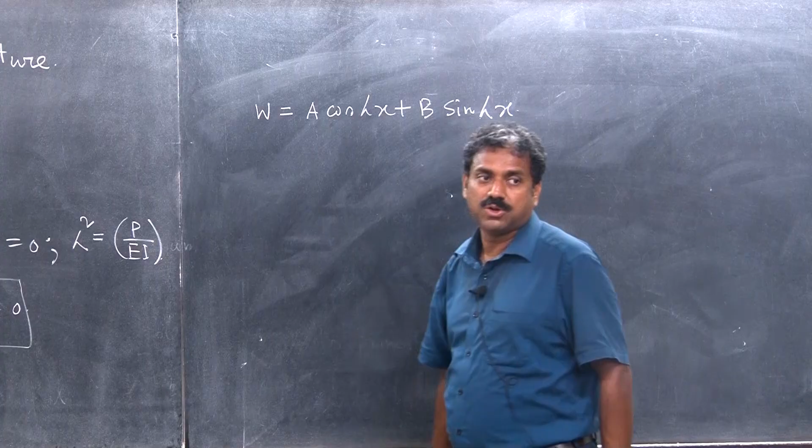When you enforce the boundary conditions, at x is equal to 0, W is equal to 0, x equal to 0 means A into 1 plus B into 0, so essentially A is equal to 0, and W is equal to B sine lambda x.

W is equal to 0 means B sine lambda L is equal to 0, which means lambda L is equal to n pi, where n is equal to 1, 2, 3, where lambda is n pi upon L, or lambda square means P by EI is equal to n square pi square upon L square, or P is equal to n square pi square EI upon L square.

So, when n is the natural number 1, 2, 3, you see that this is the critical load PCR. What we see? There are several things to note here.

Stability analysis. Here, in buckling, we are finding out the stability of an alternate configuration. Although right now we are not showing whether it is stable or unstable, what we want to find out is whether an alternate configuration exists or not. Buckling is one such thing in which an alternate configuration exists.

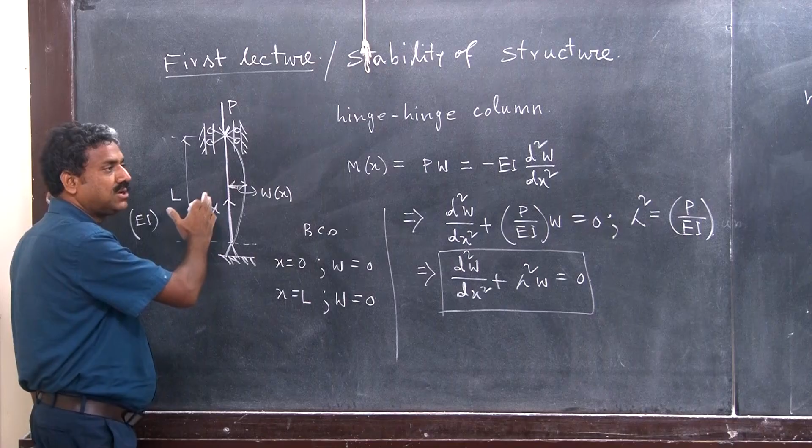That means from the fundamental path at x is equal to, w is equal to 0, it goes into a bifurcated path, buckling, because this is bifurcating to an alternate configuration. And also it is called symmetry breaking, because after buckling it will go only in one direction, it cannot go to the other direction. Whether it is right or left, it doesn't matter there, but once it buckles, it will try to diverge in one direction, right? And that led to this equation.

This is a homogeneous equation. This is nothing but, from here when I am writing this, this is nothing but an eigenvalue problem, and these are called eigenvalues. So these eigenvalue problems are in terms of what? Both are, see, these are the homogeneous boundary conditions, and homogeneous boundary conditions lead to eigenvalue problems.

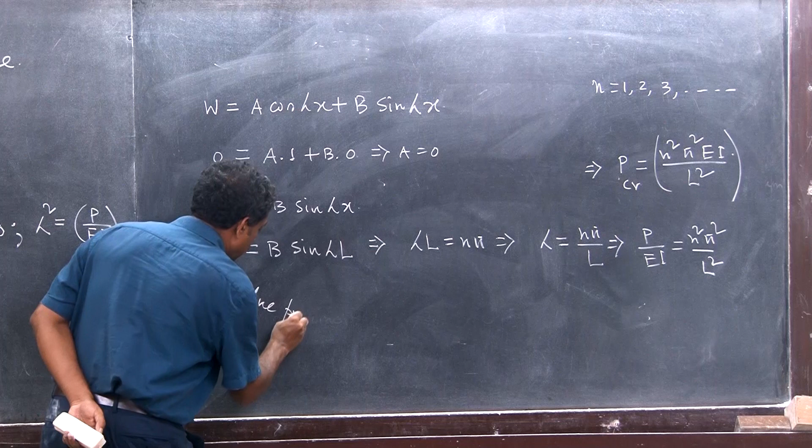Okay, and these are trigonometric eigenvalue problems. You will see all these stability analyses will lead to an eigenvalue problem if it is linearized stability analysis. There are non-linear stability analyses which will be different, but for linearized stability analysis it will lead to an eigenvalue problem, and that's where we got it.

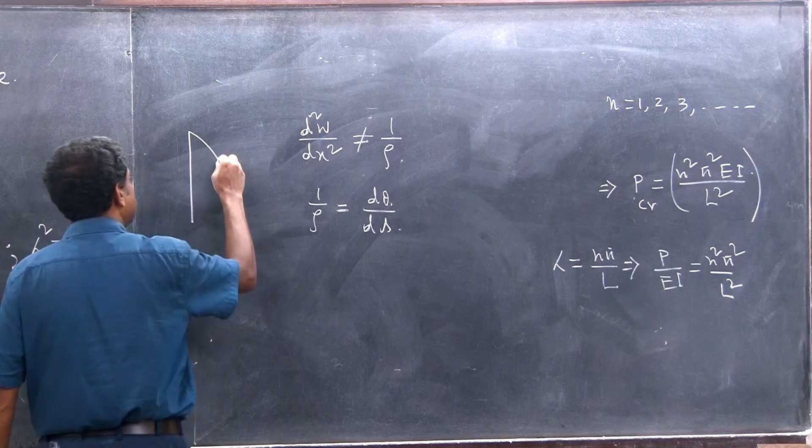So here, how the system is linearized, we are assuming the deflection to be infinitely small. However, if you want to study the non-linearity, then we have to consider large deformation, that we are going to discuss. Large deformation means d2w/dx2 is not the curvature, rather curvature will be given as d theta/ds, where this is s and this is x.

So we will be distinguishing between x and s. Here we don't distinguish between this x and this s, because both are assumed same, right. That is why this non-linearity is being linearized here, okay, but that we can put in.

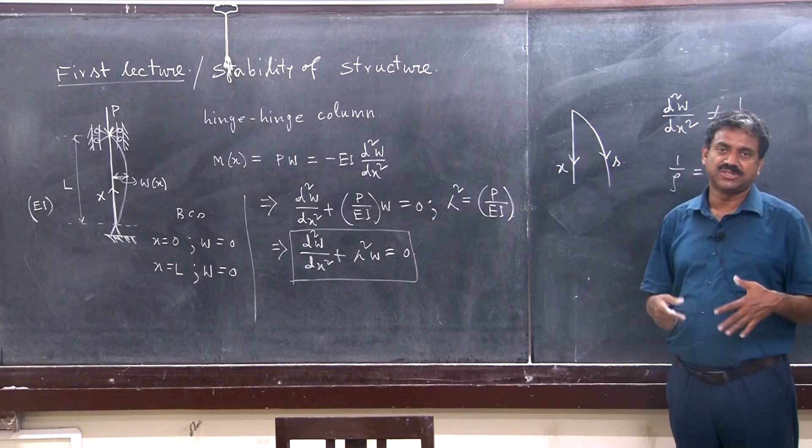And we can also define an energy potential functional here, that maybe in a subsequent class we will discuss. But before that, we are going to do a multi-degree of freedom system and stability analysis, and we will try to first use the potential energy approach, because that itself will give us a huge insight into the problem, and we will see various classes of systems, and accordingly we will continue.